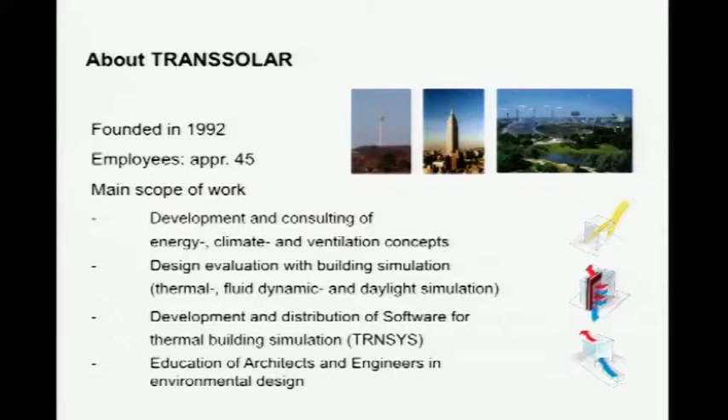Looking at our staff, roughly 50% are classical engineers with a thermodynamic background, power plant technology, thermodynamics. We have roughly 30% physicists, and even teaming up these 2 different disciplines, we made very good experiences. The approach to solve issues is quite different between the 2 of them, and by teaming up, we see better results. Then we have a couple of architects and a couple of HVAC engineers.

So master planning, as I said, we are predicting a future. We are considering or developing solutions out of what we know now for future situations. So it's really a risky thing, but it provides a lot of potential.

Why are we focusing on cities? Transsolar started on a building scale. We try to do energy efficient, comfortable, high comfort, low impact buildings. And more, we were complaining about bad master planning because it's really tough to establish a good building within a bad regulation. So at least one of our clients was pissed off and said, hey guys, you're complaining all the time, so tell me how to do it better.

That was more or less the starting point when we got into this field of master planning, applying more or less the same tools, similar approaches, and trying to develop it. And in the last 2-3 years, we're focusing more and more on cities, on urban developments, because that's one of the main issues, I think, for the near future.

Why? Recently, we got over the threshold that more people are living in urban environments than in rural. More than 30% of the population of the Earth are living in informal settlements. And I think that's a very intriguing topic.

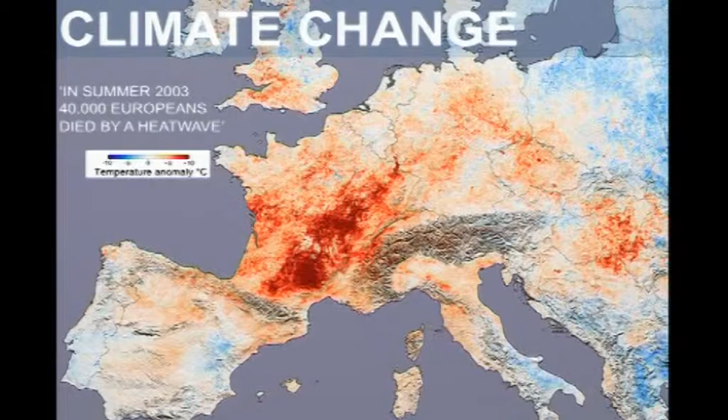So within these boundary conditions, we have another unknown: climate change. There are a lot of models, and for sure disastrous information is always a better sell than, let's say, more comfortable ones. But most of the models predict that the situation we had in 2003, where a heat wave more or less ran over Europe with the consequence of roughly 40,000 people dying as a direct result, will be the common summer of 2050.

How do we deal with that situation in our designs? We have a political situation, and the EU established a kind of roadmap to reduce CO2 emissions. So by 2020, and that's not that far away, by 20 to 30%, and by 2050, by 80 to 95% compared to 1990.

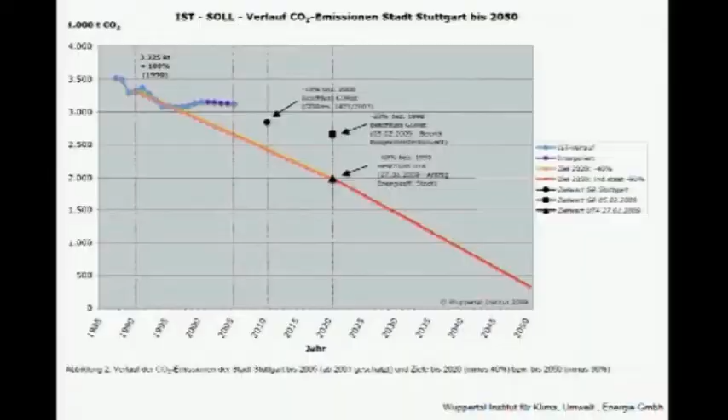So I picked up some figures from my hometown, Stuttgart, in Germany. This red curve identifies the roadmap of the EU, and the blue curve is more or less the recent situation in Stuttgart. So they're far, far away. And there are these political commitments, but in real life, looking at projects, I don't see how they want to achieve these goals within the given time period. So there's even, from an economic point of view, a very uncertain, shaky situation.

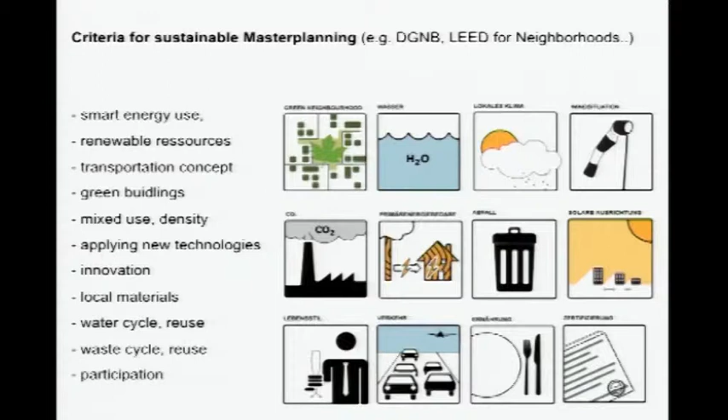So for buildings, it started roughly 20 years ago that we established certification labels for green buildings. I think LEED is one of the most popular systems, and there are systems more or less all around the world. We have Estidama in the Middle East, we have BREEAM, HQE in France. And as an extension, they developed criteria for neighborhoods or for master planning. And even looking at this criteria, it's obvious that master planning is not a one-man show, it's a team approach. And integrating all these experts, I think that's really of essence for a high-quality product.

We established that more or less a couple of years ago, to make it a little bit simpler for us. We have to deal with emissions, and CO2 is a placeholder for that. I think to achieve a vibrant urban situation, the quality of the public realm and accessibility are key essentials. And local identity, I think, is really maybe a new parameter, but driving quite a bit.

Recently, we won a competition for a high-rise building in Addis Ababa in Ethiopia. We had a first kickoff meeting with the client, and he said, at the very end, he was very pleased and everything was fine. And then he said, but I have still two questions. One question: where's the exterior shading? I highly appreciated it because the architect didn't find a way to integrate exterior shading, what we required, more or less through the whole process, in a kind of aesthetical way, so he skipped it for the competition.

But the next question was, where is our African identity? I don't want to have an American high-rise here, I want to have an African high-rise. And how can we transfer your knowledge, your technical approaches, to the local craftsmanship? So how are the social aspects related to this project? And I think, from a bank CEO, I was really astonished, let's say, to have this kind of criteria for a project. And for sure, nobody wants to sacrifice quality.

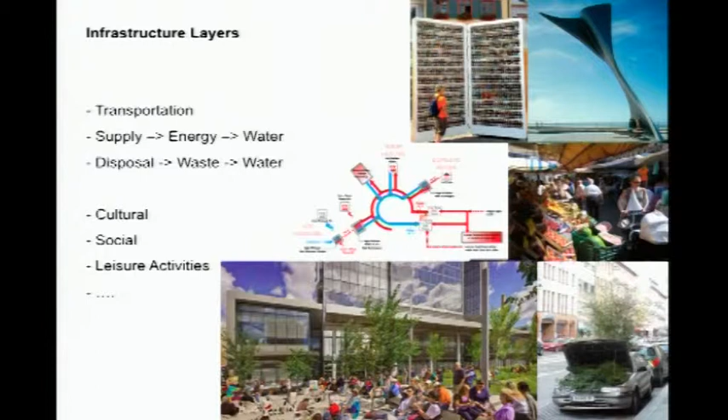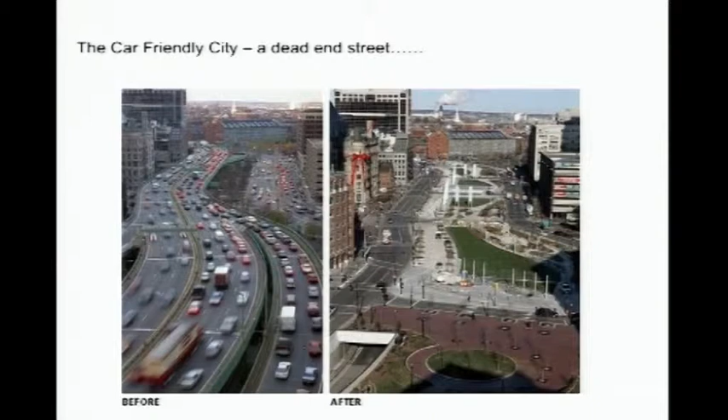And I think looking at master planning in the past, all the approaches developed a scheme focusing on one parameter only. In Germany, we had this hype on the car-friendly city in the 60s and 70s. It ended as a disaster. And now we're slowly trying to go back, improve the urban quality, the quality of the public realm in the downtown areas.

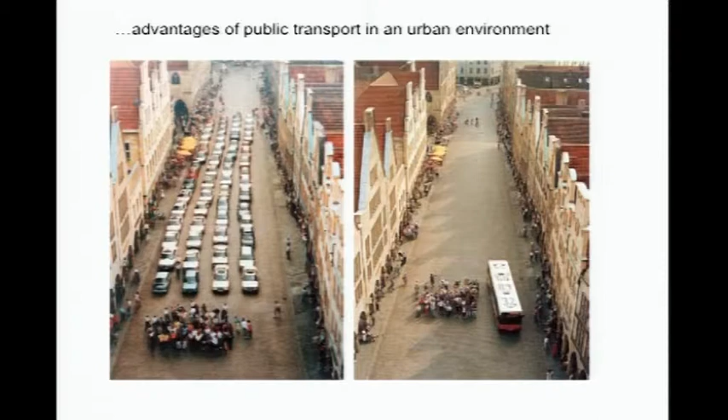So I think the advantages of public transport are obvious, looking only on the space consumption. But especially for a situation like here, we have to think about the connection between the urban situation and the rural situation. Where are the transfer hubs where you can jump on public transport? I think that's something which has to be developed.

Recently I got this figure, and that's a quite popular neighborhood in Stuttgart, really a very dense area. The car ratio is 70% lower than typical for Stuttgart. But 60% of all the car movements are related to leisure activities. And it was something strange, but looking on the city map, parks or places where you can go for a run in the morning are not located very close to this area.

So the people use, for the daily life, public transport to a very high percentage, but for these leisure activities, which was not considered really in the programming of this area, it was a little bit neglected, with the result of car movements.

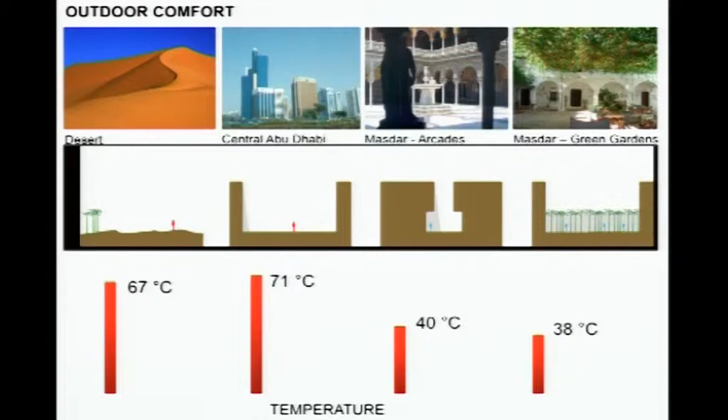So if you go back and have a look how people dealt with that kind of climate in the past, we go significantly down to 40 degrees. It's still not comfortable, but I would say you can survive. At 71 degrees and 80% humidity, it's simply close to dying. And if we improve the situation, we could go even further down.

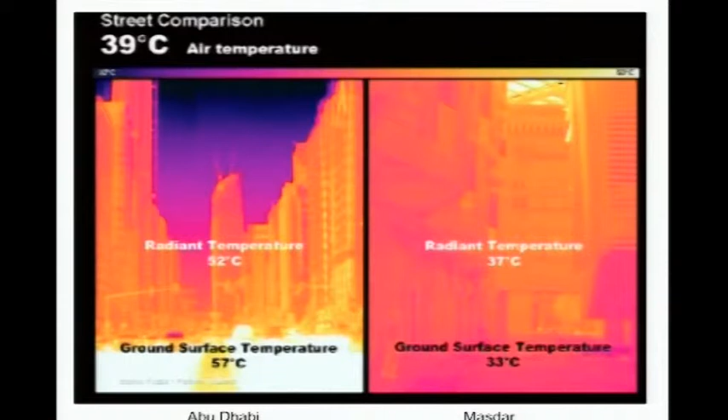We worked a little bit on this Masdar project, and I think there's a lot of discussion for this emission-free city. But we did some simple measurements, and you can measure these effects - it's not something only in theory. So we compared a main street and a place in the Masdar development, and we have really a significant difference. As I said, it's still not comfortable, but you can walk there, you can do whatever you have to do in a pedestrian way.

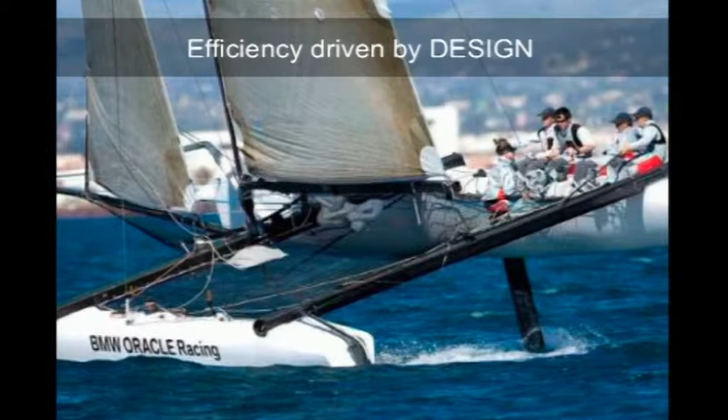So design is really something which has a high impact on the quality, not only of the interior, but also on the outdoor public realm. And that's more or less my credo - the most important slide.

Sustainable development, sustainable planning, whether master planning or related to a building, requires communication. And it seems like a no-brainer, and it seems quite easy. But even with the first meetings, I recognized that the communication, especially between engineers and architects, is difficult. And first of all, I thought it's a typical German problem, but I experienced that situation more or less all around the world.

I was teaching for 2 years in the United States, and I had a great idea to do combined studios with engineers and architects. But approaching the dean of the engineering school, I received a nice email that said, great idea, and I never heard again from this guy. And my architectural dean, she looked at me and said, why? And this level of ignorance on both sides, I think, is really a big obstacle.

I would encourage you to understand this, because it's your daily business life. You have to deal with these guys, and communication requires a certain level of knowledge. I don't think you should be able to do the engineering work, but you have to be aware how these guys are thinking, what their tools are, what the limitations are. You should be able to raise the right questions at the right moment. And in my experience, if you achieve an intense communication in the project, even a tense one, it will be a good one.

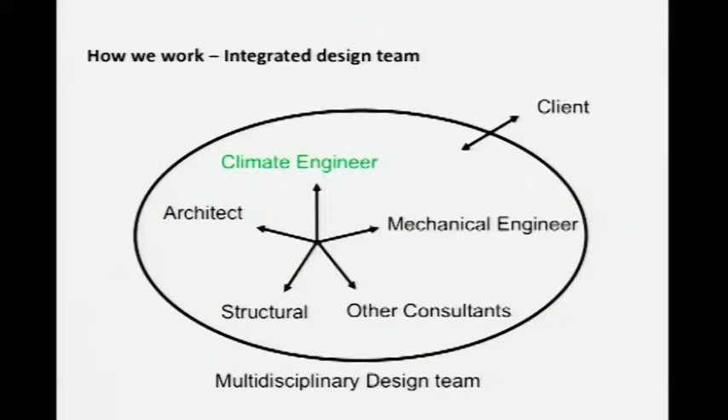So we did this highly sophisticated scheme two weeks after founding the company, and it's only coincidental that this climate engineer is on top. We think the design team is more or less an integrated team. Everybody has to bring their experience to the table, not only as an expert but also as a potential user. In this communication and embedding the expertise of all these guys, then we're on the right way.

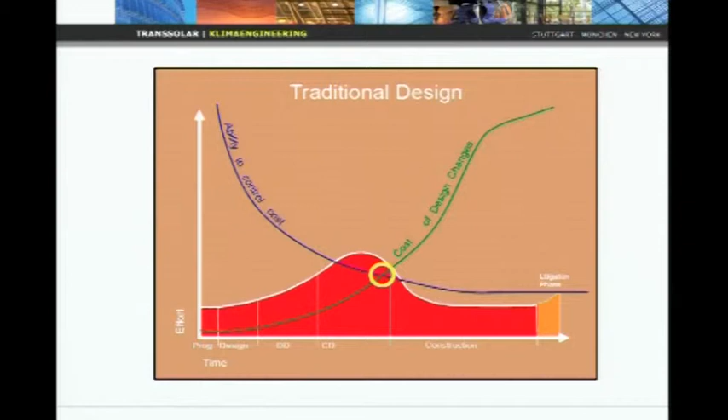And for sure the client has a big impact on the whole thing. So typically when we start a project, the first question is, what is the impact of your work? Because you're not the only player in the game. I got these slides from a business school, and they tried to analyze the design process. On the lower X-axis we have the process of the design phases, and the red curve identifies the effort. They figured out that the main peak of effort is during construction documents, when you do the detailing.

Looking at the impact of changes in terms of costs, it's obvious the later change orders show up, the more expensive they might be. On the other hand, the ability to control cost is reduced as the design progresses. The big decisions have to be made in the early phases, and that determines, let's say, 80% of the costs.

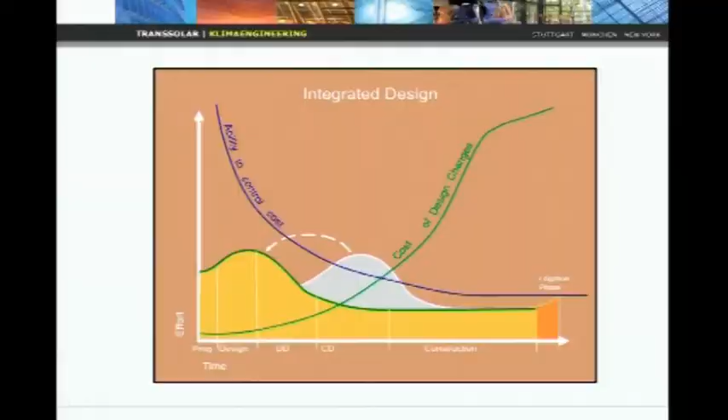So what we propose is more or less to do the same amount of effort, but shift it to the early design phases. Because today we have all the tools for analyzing, modeling, and doing an assessment of the performance of different options that we can provide to the client or whoever the stakeholder is, as a basis for decisions based on figures, not on gut feelings. We can evaluate what the performance will be. So at the very end, it's the same effort, and we achieve better products.

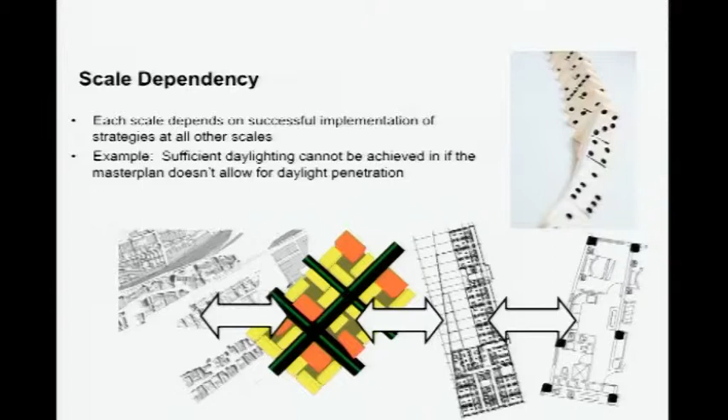So this modeling closes the gap between design and engineering. In addition, as I said at the beginning, we have to rely on each step. If one step leads to a bad result, you cannot really compensate for it in later phases. We need a good master plan, a good block scale, so that we can achieve a high-performing building scale. Each design step has to be done with the same level of scrutiny.

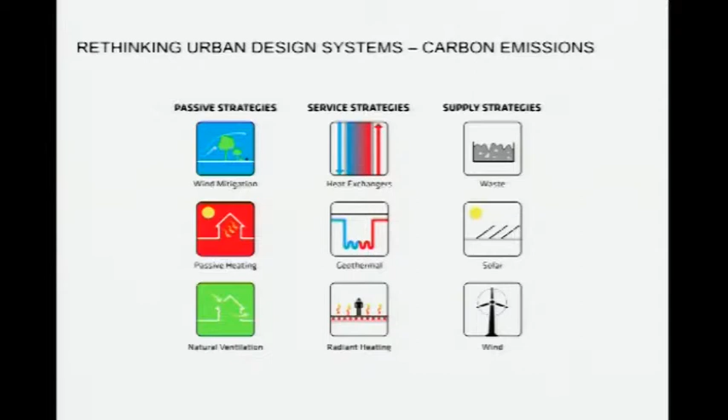For our field, we typically use this three-step approach. I think the lecture before had a four-step approach. First of all, we try to maximize what we call passive performance—solar exposure, the envelope, if you're talking about a building, and so on. In the second step, we look for appropriate building systems and service strategies, and the last step is more or less the supply strategy, so that we can maximize the use of renewable resources.

The problem is that you cannot do these steps in a sequential order because each of them is linked together. There might be a resource available, but this resource, with its limitations, has an impact on the applicable service strategies. So you have to do it vice versa as well.

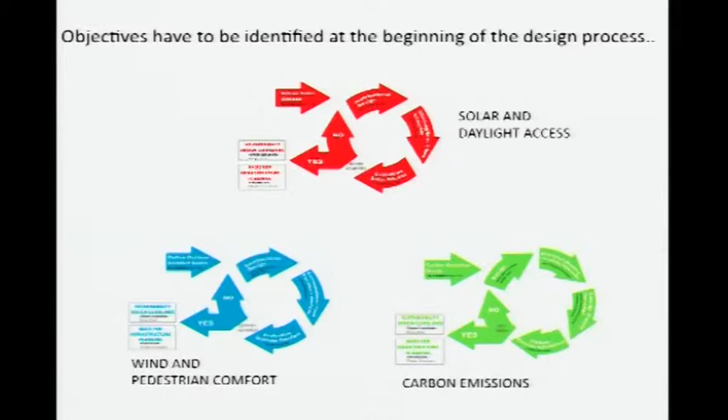So the design process is a kind of iterative game. We have several parameters to optimize, and each of these parameters is linked within a system. Changing one parameter might have an impact on others, so it's not a one-way road. We have to do these iterative cycles, optimizing and looking at the impact on others, so that we achieve, let's say, a well-balanced, well-tailored system at the very end.

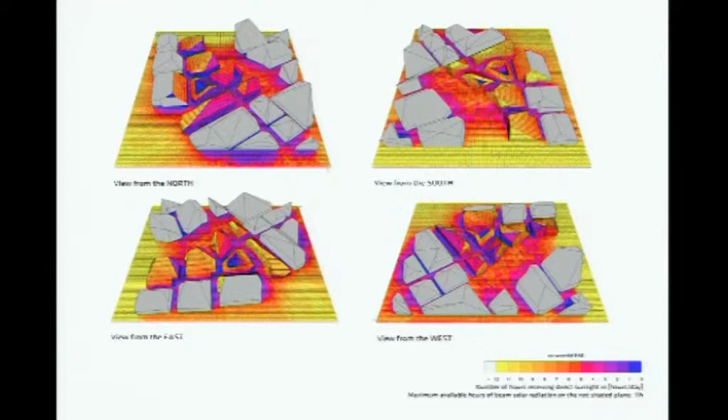So as a little example, we worked on a competition for Helsinki. And as one important parameter, we identified daylight. So we worked a little bit on solar exposure. And the question was how to more or less apply that to a building scale. So we developed 2 different angles.

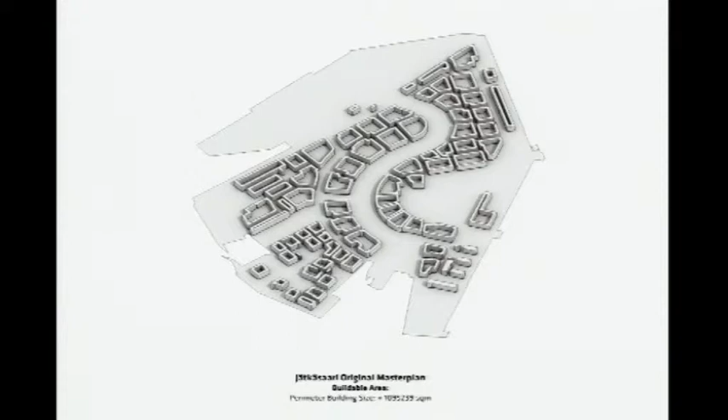South side, it was a kind of focus on harvesting solar energy, passive solar gains. For the north-oriented facade, it was focused on daylight. So we had these 2 different angles. And it was more or less the master plan at the very first beginning. And the architect simply applied these kind of rules very clearly, let's say, to this master plan.

And it was funny how a quite vibrant pattern popped up. I think it was too scaring for the developer. I'm not sure if that was the reason that we lost this competition, but it was for us a very nice example.

So I put a slide in because I suffered roughly 1 year with this little problem. In Germany, we had a hype on district heating systems, I would say 10, 15 years ago. A lot of communities invested in district heating, linked it to combined heat and power generation or waste incineration to reduce CO2 emissions, which makes absolutely sense and is a reasonable thing to do.

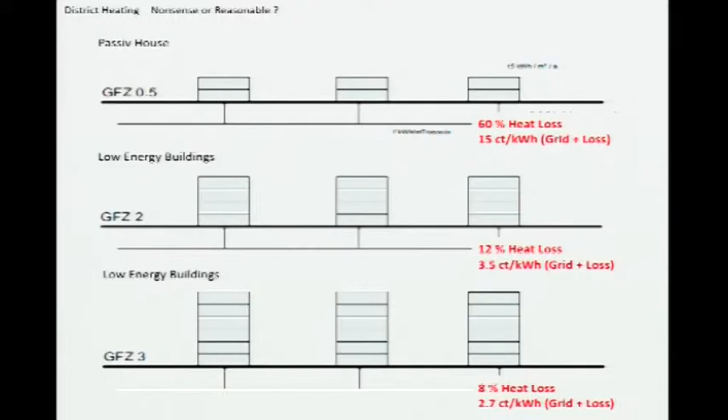Then more recently, the Passivhaus approach became very popular in Germany. Passivhaus means you have a highly insulated, airtight building with a mechanic ventilation and a very minimized heating consumption. So now the problem is that a lot of these communities have these district heating systems and then do the combination with Passivhaus. So for new developments, they require Passivhaus standard. And it seems to be logical that a good system and another good system makes a very good system.

So in addition, to reduce the heating demand of a Passivhaus, you have to use mechanic ventilation, which is not very common in Germany for residential units. Which means that you operate with highly rated electrical energy, a ventilation system, to minimize heating consumption, which is already produced in a very efficient way with very low CO2 emissions. So if you do the balance overall, by combining these two good ideas, you increase the CO2 emissions, which is a contradictory point.

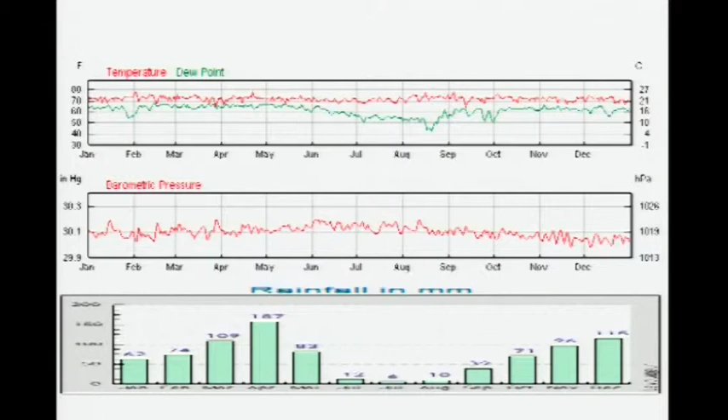So going to a first little project, and it's not really a project. It was a development, a hospital in Rwanda, and the whole scheme was developed, I would say, within 2 hours in the coffee corner, because it's an unbudgeted project for us. And looking on the climatic situation, it's very close to the equator, but it's really perfect. It's not too hot, not too cold. The humidity is appropriate, so you don't need any kind of mechanical systems, more or less, to condition outside air. All over the year, it's very comfortable.

So the site is in a very hilly area, and they had a problem that the technical infrastructure, for example, the supply of electrical energy, was not really reliable. They used an old generator driven by diesel, and it went out of order very frequently. The problem was that the mechanic ventilation system then stopped, the systems for the surgery stopped, and the question was how to make them more independent from these technical approaches. And then this very, very simple scheme was developed that we maximize natural ventilation. We take benefit of the local wind situation there, maximizing daylight supply into the spaces.

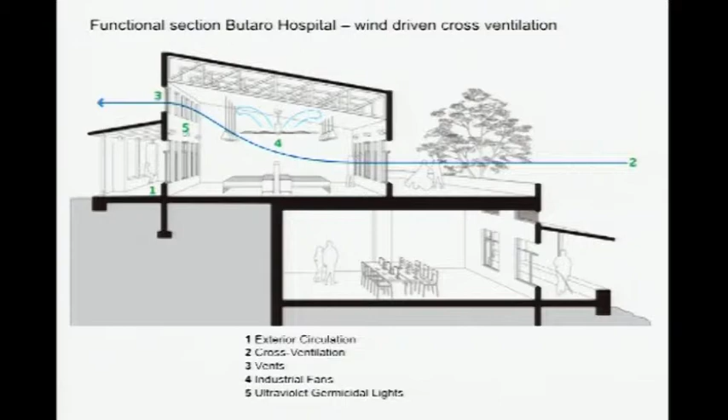And for that, we had a long discussion with a Swiss expert on hygienics. I think the Swiss are the most experienced guys for hygienic issues. And he said, from his perspective, he's voting for naturally ventilated surgery rooms because the infection rate is directly linked to the airflow you can create, and there is no mechanic system able to create airflows which we can create by natural ventilation in this kind of situation. So even from a performance point of view, we have better results now than before.

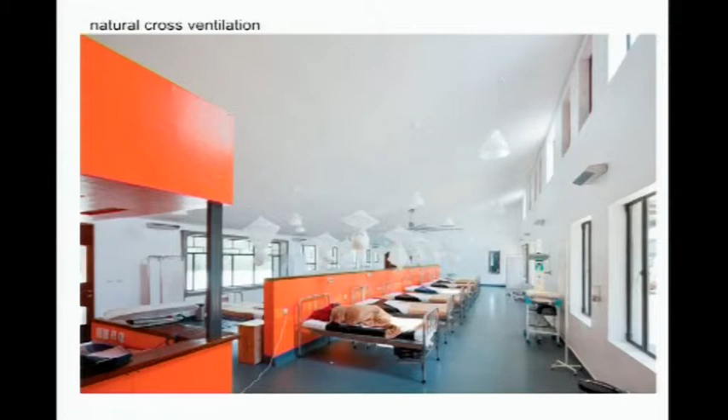And you see it's a kind of daylight flooded space, very simple, very easy, but it was done completely with local materials. The technical installation is very limited, so the people are able to operate it in an appropriate way.

The client appreciated this approach, and so the next project was coming up. It's a kind of retrofit and extension of an existing hospital, and it's a slightly different site. It's in a valley, so we don't have these prevailing winds supporting natural ventilation. So the idea was to use solar energy to drive the ventilation.

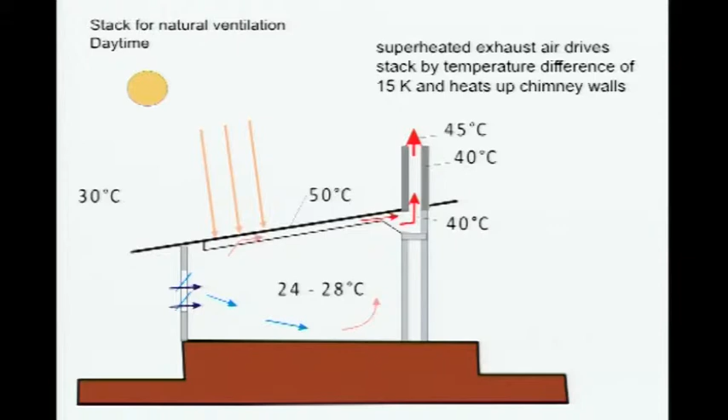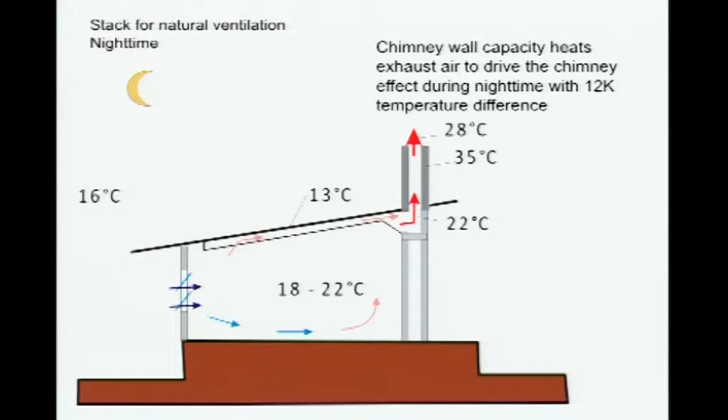So in this scheme, we have a kind of collecting solar heat, very simple, with a roof. We overheat the exhaust air, and then we have a kind of solar stack on top. And this stack heats up during the day so that we still have some energy left during nighttime hours to drive this ventilation. The advantage we have is there's no mechanical installation at all for this ventilation purpose.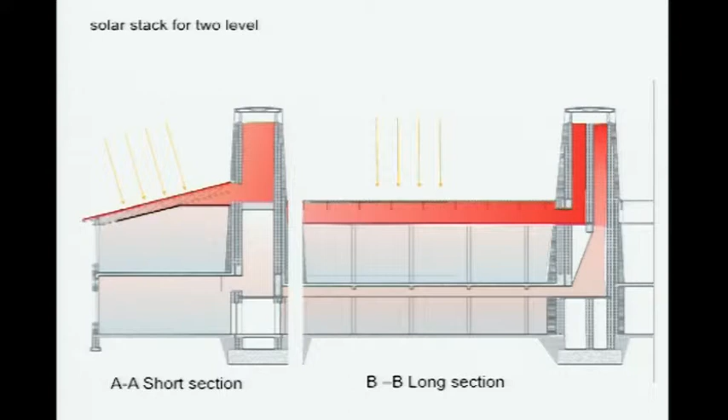It's under construction, and I'm really keen to see how it will work. It's a 2-level building, so we developed a scheme more or less that we have a possibility to apply the lower level to the same solar stack, that we have more or less similar situations.

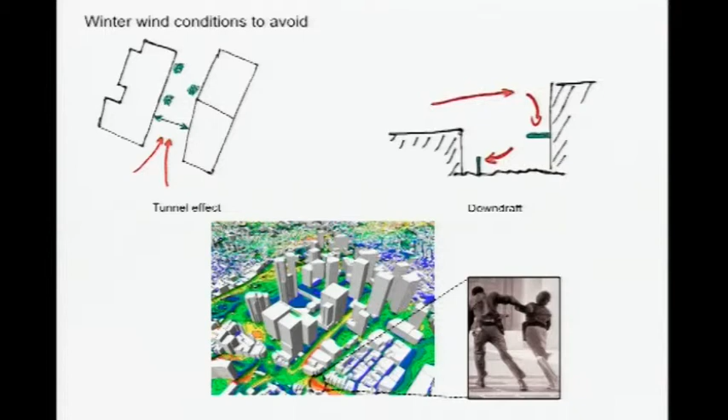I think it's obvious that there is an impact of the built environment on the wind situation, and it's not really highly sophisticated, but not considering this situation, you can create really awful places. So we're talking about, let's say, narrowing wind or redirecting of wind through the building height. And typically that's a starting point for master planning issues.

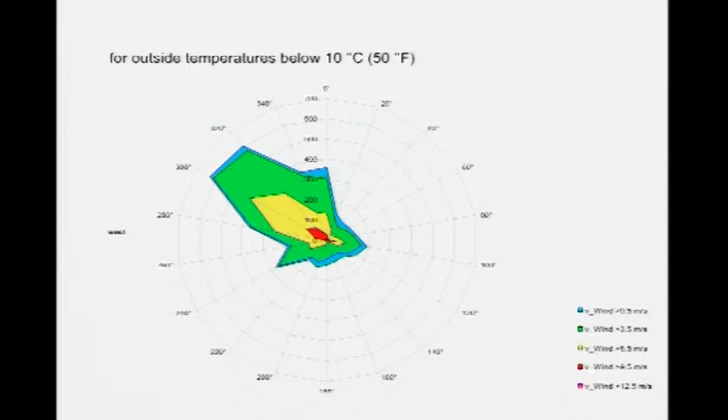So that's an example for Boston. So we have winter winds out of this direction, northwest. And the summer winds, the warmer winds, are coming more or less from southwest.

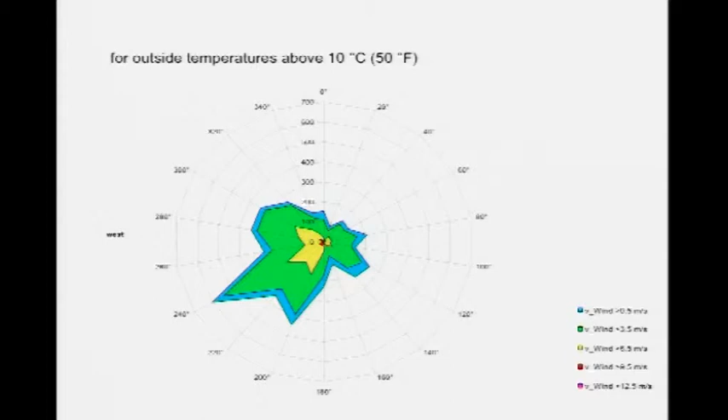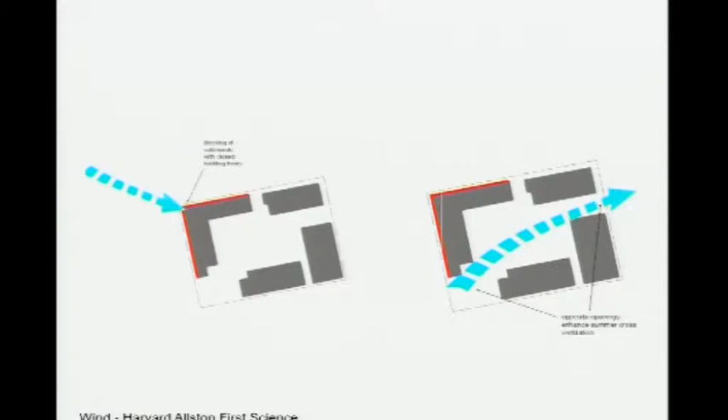Oops. So the architectural idea for this development was the Harvard Yard. So very British approach with courtyards and buildings surrounding. And so we very simply rotated it a little bit, that we block out the cold winter winds and have the openings more or less for the summer breeze. For sure, you cannot consider only, let's say, a local situation. You have to consider, let's say, the whole setup.

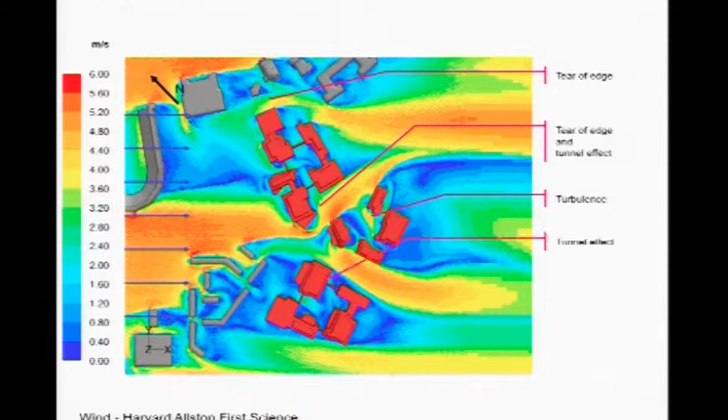So we have the gray buildings, which are the existing ones, and red ones as the planned new developments. So we have the situation of an edge situation where air accelerates. We have the edge combined with a tunnel. And here we have a low pressure zone which redirects the wind, creating high wind velocities in front of the other building, and so on. So you have to consider, let's say, these simple situations and their way to mitigate it.

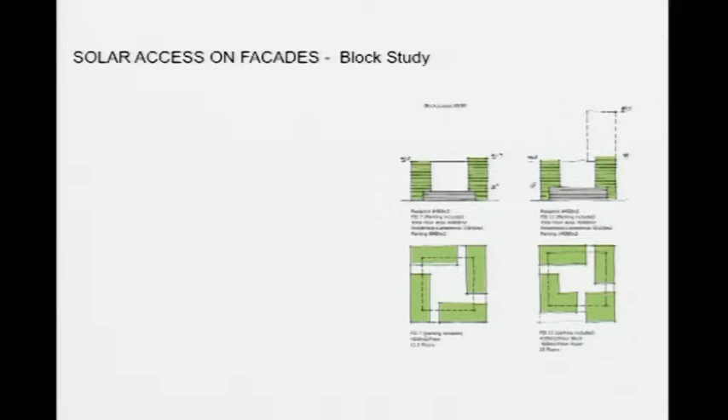And here I want to show you a project where we applied these kind of rules. So I picked out two aspects. So for sure we worked on energy supply and so on. But I think one interesting part was the solar study we did at the very first beginning. And the question was, what is the ideal grid for this setup? It's a development in Toronto in Canada. And I think it's a very common situation. It's a former industrial harbor area now transferred into a kind of residential area.

So one starting point was that solar exposure. There are a couple of rules all around the world, slightly different, but dealing with direct solar radiation on residential areas. And we picked them up and tried to focus on that. So we worked with different sizes of the streets and different orientations of the grid.

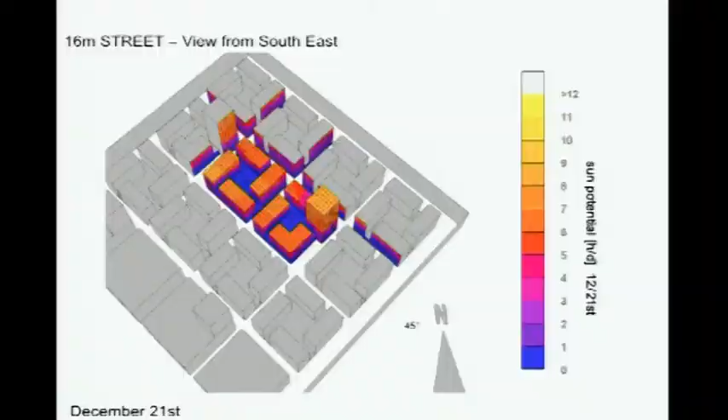So we started with north. Then we rotated it by 20 degrees. And the last option was a rotation of 45 degrees. And the question was, what is the impact on the solar exposure? And we did that little exercise for different street sizes.

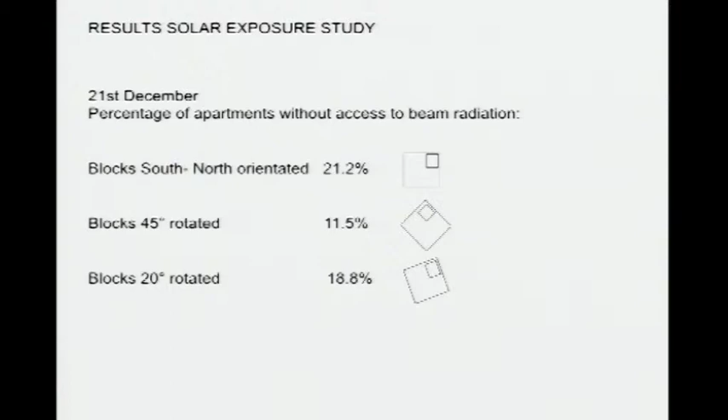And looking on the results, I think for us it was quite amazing that the 45-degree grid more or less reduced the number of apartments with a blocked situation by 50% compared to the north-south oriented grid. So that was one of the main reasons to go for a 45-degree oriented grid.

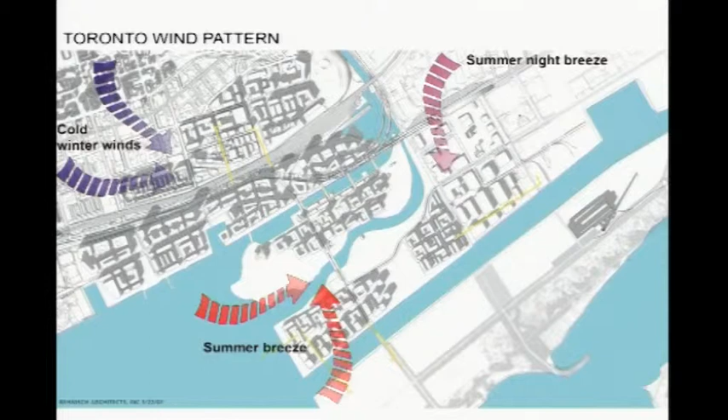So then we identified, let's say, important areas to protect, pedestrian areas, areas for leisure activities in the public realm. And I think you have to be aware it's not a black and white decision. We will not cover 100% of the year providing highly comfortable situations there. But we increase the time of good conditions, let's say, by 20, 30, 40%. And that's the goal of this exercise.

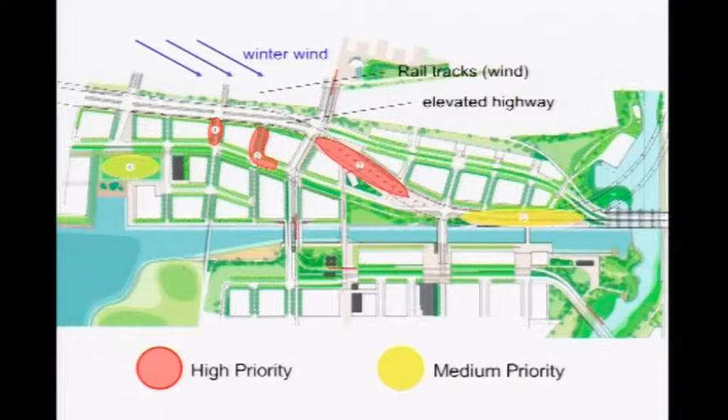So we identified critical areas. So we have wind acceleration. And then, for example, here with a little recess compared to here, we reduce the air velocity significantly on the pedestrian level. So very simple geometric approaches to handle, let's say, these situations.

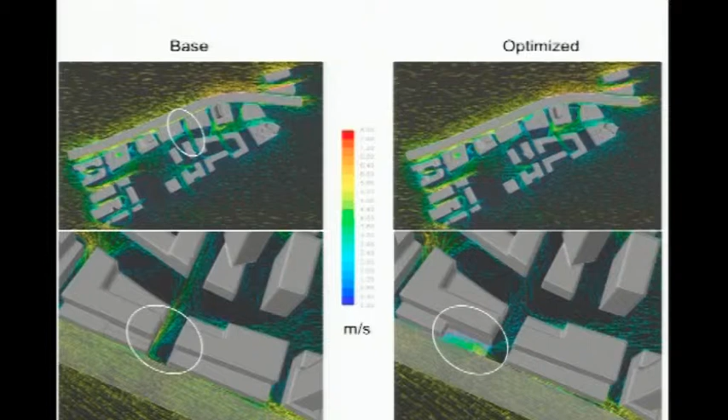And here we have a similar situation. We have a downdraft created by this little tower here, with the result of high air velocities on the pedestrian level. And by raising this recess up, we could handle that.

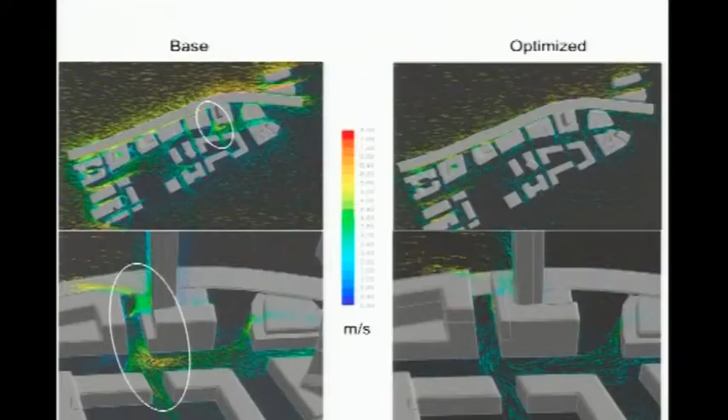So we did this exercise for a couple of block elements, but the question was how to implement it, how to make sure that for the next 10, 15 years of development, these kinds of guidelines will be respected. And the idea to define the geometry of the volumes sounds like a ridiculous idea for us, because we cannot predict what kind of program will be there. Is the geometric approach we have reasonable if the program changes dramatically, which could happen each day?

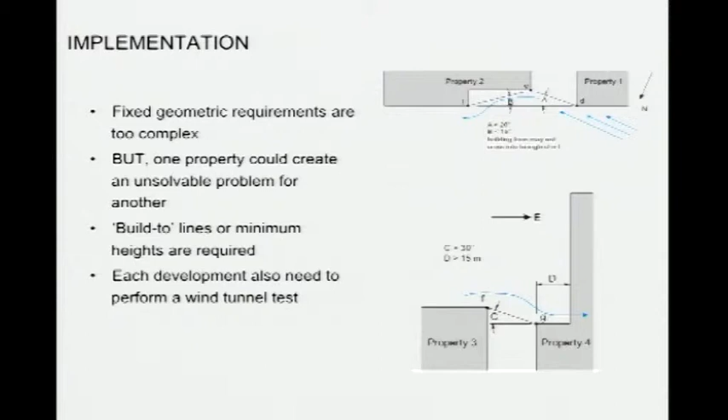So the problem was to be sure that there's no negative impact on the future developments. So the idea was to define very simple guidelines in terms of distance and height, and to make it mandatory that each new development has to pass a kind of wind tunnel testing. So if you sign a contract buying a piece of land there, you also sign this kind of commitment that you will go through this wind tunnel testing in a predefined, organized way. So we're quite sure that these rules will be applied.

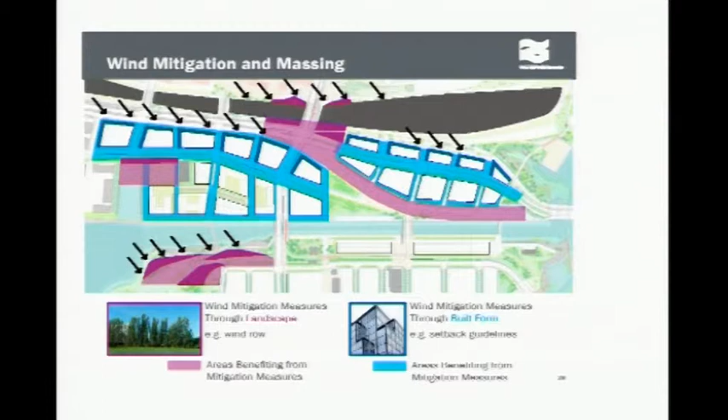So we can jump over that. At the very end, to mitigate wind, we have two main tools. We can use landscape, hedges, trees, this kind of stuff. And we can, for sure, use the built environment. And the combination of these two leads to the results we're shooting for. But it's obvious that it requires all kinds of experts around the table to find an appropriate way to implement these kinds of approaches.

The next project I want to show you is focused on a building itself. It's a high-rise in Winnipeg, Canada. And I wasn't aware that people are living in such climatic conditions, I have to confess. The first time we arrived there, it was in the range of minus 38. But in summer, they go up to 35, 38 degrees with high humidity. So you have a long, awfully cold winter period and a 6 to 8 week summer period with high temperatures and high humidity. So it's really a very continental, dramatic climate.

We had a first contact with the client. He was sending a team of people all around the world to identify best practice in green buildings, because the board decided to put a certain percentage on top of the building construction budget, but they wanted to have the most sustainable building in the world, or at least in North America. And I think it was the first project where we signed a charter at the beginning, defining the goals and objectives of this project. And it wasn't only all consultants signing this charter, it was also the client itself.

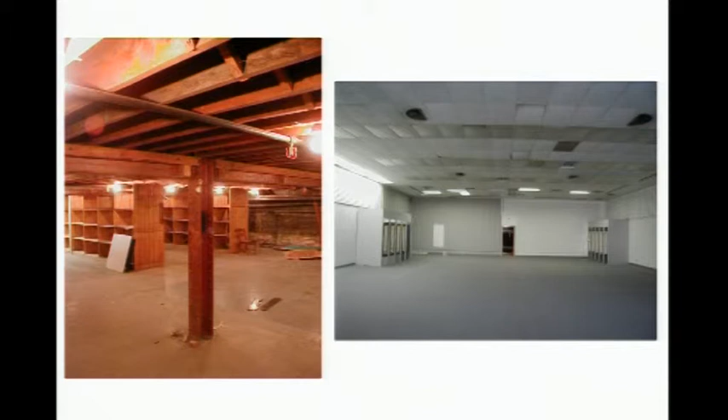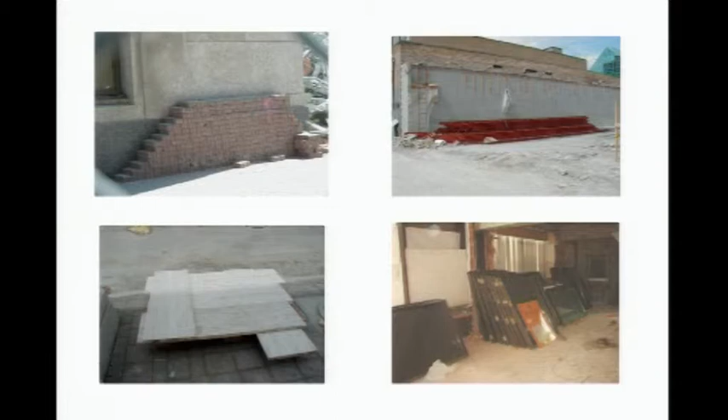That's the site before we got started. And even in the deconstruction phase, the client was very keen to separate materials. I think it's not that outstanding in our area here, but for North America, it really was a quite aggressive approach.

One of the existing buildings is a bank building, and all the partition walls were in really good shape. And coincidentally, we ran into these guys, a non-profit organization doing construction for hikers in the wilderness. And so we had a direct reuse. Most of the partition walls went to these guys. They were on the way to retrofit their building, so they could use all this interior stuff.

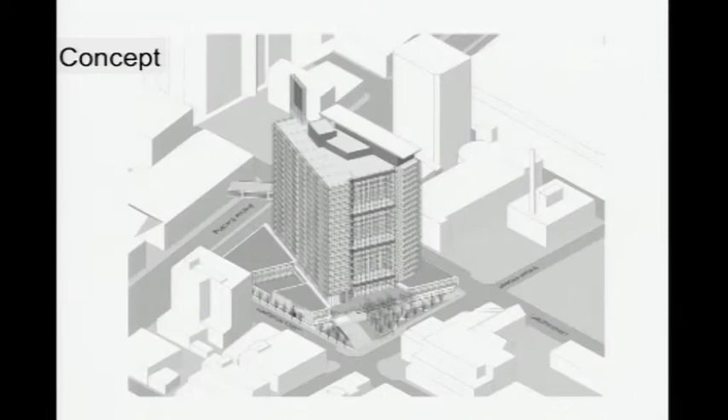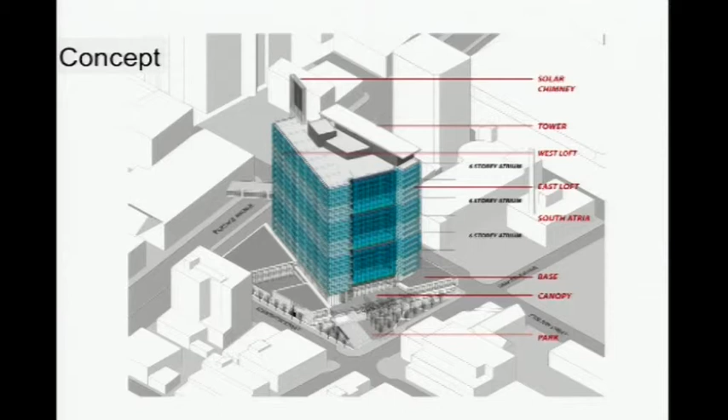Looking at the concept, we really did a thorough analysis of the local climate conditions. And one thing we figured out was that in terms of solar insolation, they have double the amount of solar insolation in winter compared to mid-Europe. So it's a combination of a very cold but sunny and bright climate in winter. So the main idea was to do a south-oriented building with huge greenhouses oriented to the south for harvesting solar gains. And we do a kind of preconditioning of outside air in these greenhouses.

The energy supply system is based on a geothermal field underneath the building, so we have 280 boreholes. And on the exhaust side, we have a solar stack, so there is no mechanical fan to exhaust the air.

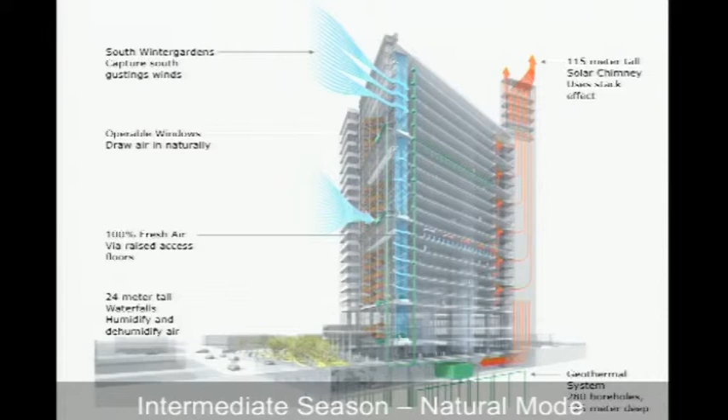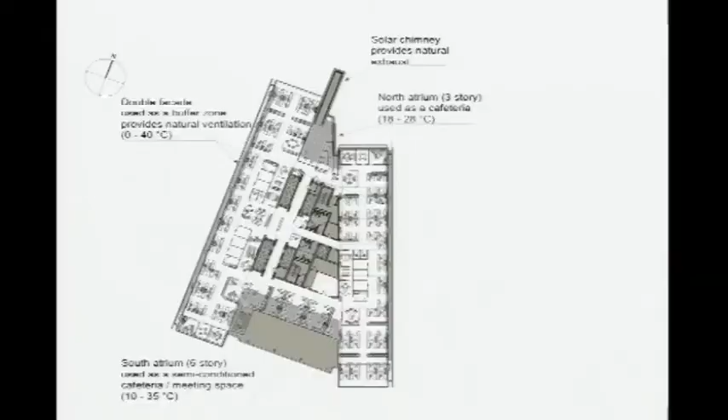If you look on the floor plan, we have the south-oriented atrium space, and we wrapped a double-skin facade all around the building, where we control the temperature of this cavity and keep it always above freezing. For sure, we're sacrificing a certain amount of energy by that, but the client told us that in all of their buildings they experience serious problems with molding and freezing in winter because they have to humidify outside air at very low outside air temperatures. So at each leakage in the facade you get condensation and then the problems. This approach is meant to avoid that.

We addressed new technologies for this area, so we use the whole ceiling as a mechanical device for conditioning the space. We have pipes embedded in the ceiling, and we run hot or cold water through it, so we temper more or less the whole building with it.

The ventilation system only has to cover the hygienic demand, to ensure good air quality. What you see here on the left side is a mechanical space, because we bring outside air into these spaces. In winter, we preheat it by solar gains, and then we have little air handlers on each floor supplying air into the floor spaces. On the exhaust side, we have the heat recovery connected to the air intakes here.

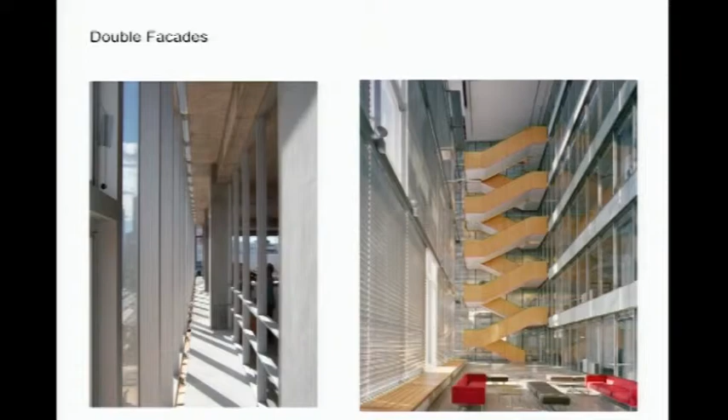In addition, we have a water wall installation. It's a kind of fountain where water runs down on cables, and we use it in winter for humidifying outside air and in summer for dehumidifying. It sounds a little odd to use water for dehumidification, but it's basic physics: if the water is cold enough, the water in the air condensates on that cold surface, and we get the required effect.

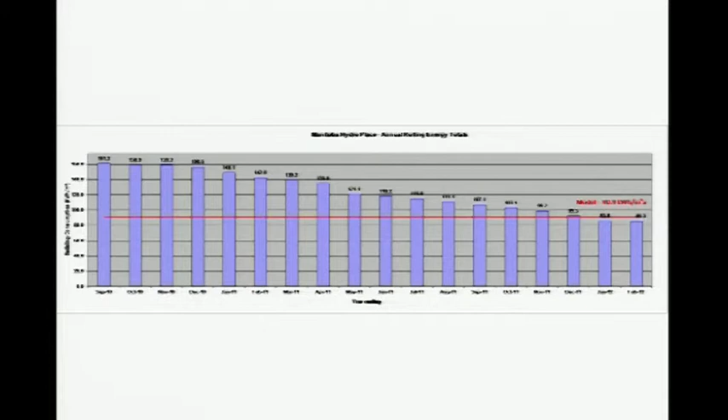If we put it into comparison with other Canadian buildings, we see that we're performing quite well.

But what brings this whole thing into a more urban context is that the awareness of the people is really astonishing. Roughly 70% of the employees moved from individual traffic to public transport, because they were spread in small units all over town, especially in the suburbs, and now people are reluctant to go with their own cars into the downtown area. The guys there told me it has a really beneficial effect even on the social life of the employees, because before, after work, they went to their car and went home. Now they share a ride on the bus or a drink in a bar or whatever, so the communication between people has increased significantly.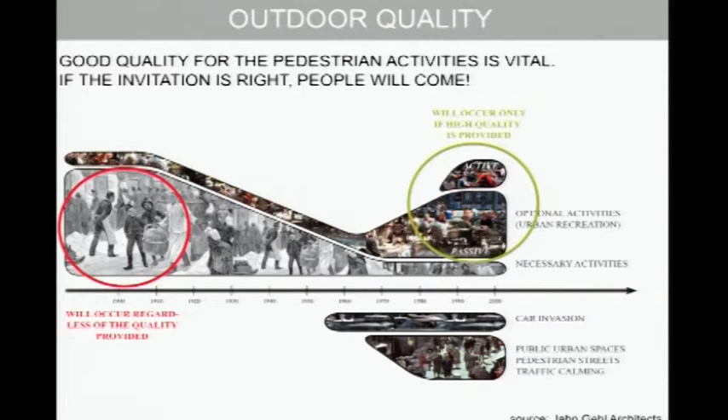Looking a bit at outdoor comfort, I borrowed this slide from Jan Gehl of Copenhagen. I never had thought about this, but his point is that in the past you had to use the public realm for business and many activities. Today we've reached a point where it's not necessary anymore—the cyber kid could sit in his flat, order his pizza via internet, do his banking online, do his business online. So to provide a vibrant urban life, you have to provide quality in the urban spaces. We're lucky that car invasion, as he calls it, is being reduced more and more—people are no longer accepting being tortured by cars. So the focus on public places gets more and more important.

On outdoor comfort, here's an example from a completely different climatic area. We had a request from the mayor of Muscat—they want to improve local conditions in a lot of places, translating slowly toward high-quality tourism operations, and for that they want to improve outdoor conditions at certain spots. So the question was, what can we do in our climate to make people feel more comfortable? This relates to perceived temperature.

Perceived temperature considers air temperature, air humidity, wind speed, and mean radiant temperature, which means the temperature radiated by the built environment. So that gets very close to what you feel.

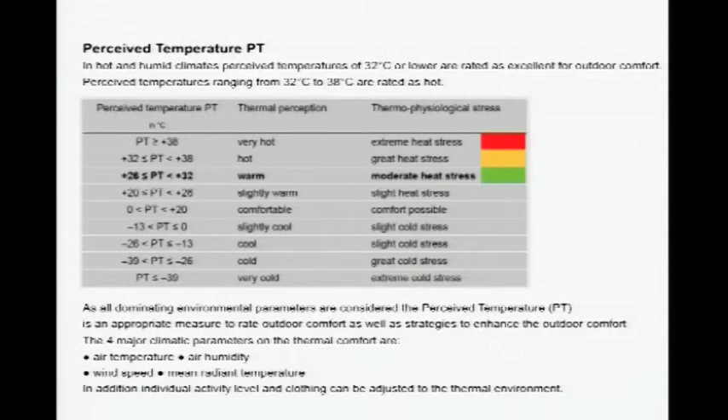And we use this tool, supplied different measures, did some simulations. At the very end, we developed a kind of catalog identifying measures with specific parameters, so they can use it in a very easy way, what they want to apply, what is the level of comfort.

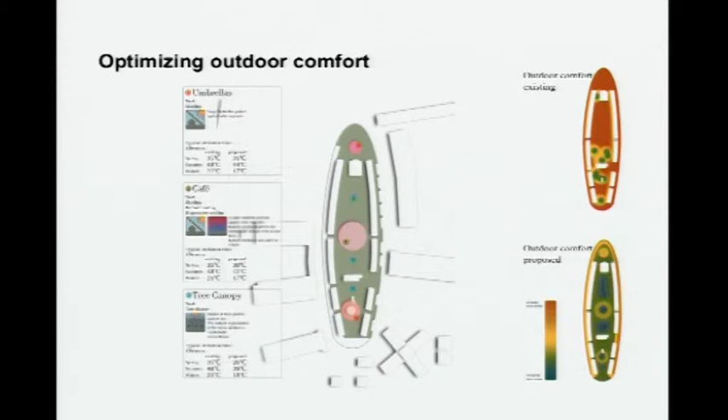They want to achieve at a certain place. And it's a kind of escalating hierarchy. We did this calculation for one example. It's an open fruit market. And the question was, what can we achieve with very low, very simple approaches? What is the reasonable thing to do?

So now we're jumping back to my hometown. I think we had a very simple African project, a more technical North American project, so I have to speed up a little bit. Now we have a simple German project.

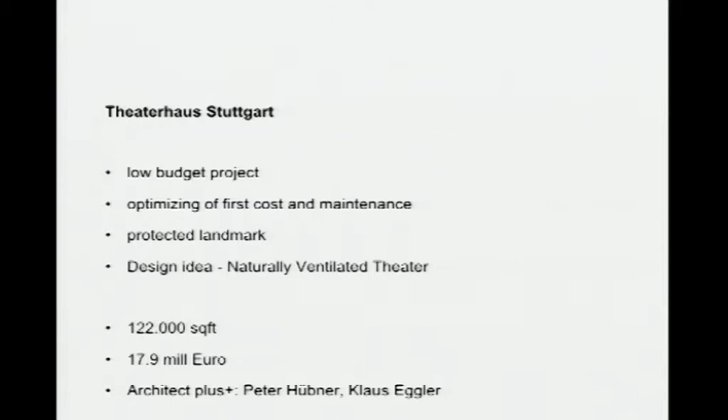These guys, a private association, had the idea to provide a cultural space for alternative culture. So they founded a little company and had a warehouse in the suburbs of Stuttgart. It was very successful, but the climatical conditions were harsh, awful. So they approached the city, and the city donated a site for them. We worked roughly 15 years, from the very first beginning raising funding, raising money, till the very end.

The scheme is very simple. We go in, we have a ground-coupled earth duct for preconditioning outside air, preheating in winter, pre-cooling in summer. Then we enter the theater space, and then we go up through an air stack.

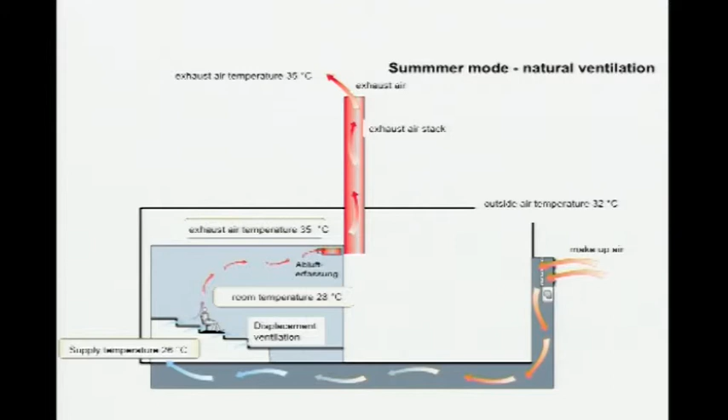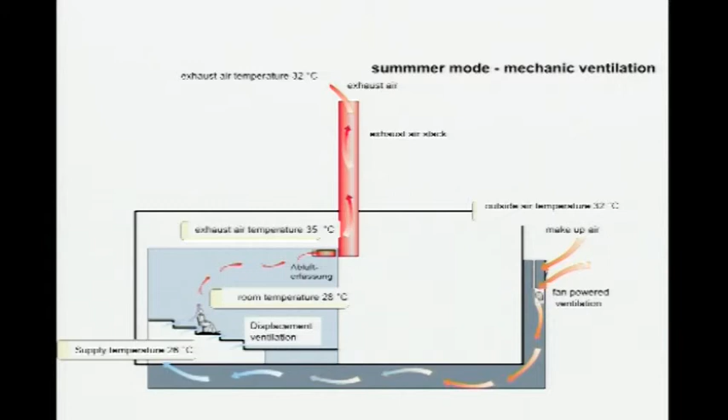If we don't have enough airflow, because by code we are requested to provide a certain amount of air to the space, then this flap closes and a fan ensures enough airflow through the space. The whole system is designed for natural airflow, which means low pressure drops, big sections, so the fan benefits because we need roughly 10% of a typical fan power to move this amount of air.

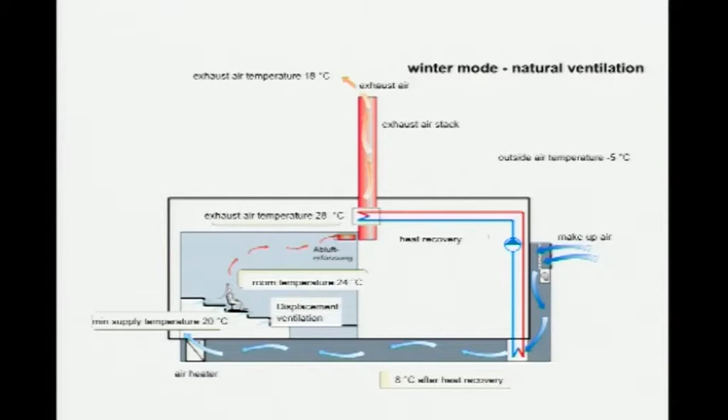In winter, we have a heat recovery system which recovers roughly 50% and leaves enough heat in the exhaust air to drive the air exchange.

So we did a lot of calculations, a lot of proceedings in this kind of development. But due to the lack of budget, we reduced the system step by step. At the very end it was a very simple thing, very cheap, because we had to do this excavation to reinforce the existing foundation. So we had this void, and we filled it up with our air ducts.

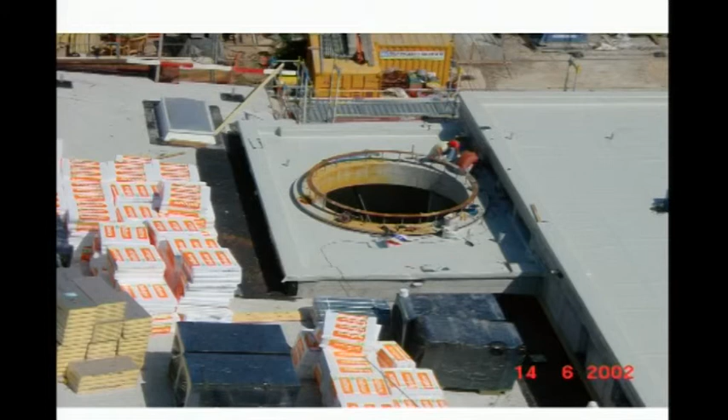That's the base of the exhaust stack. It's a landmark protected building, and we had a long discussion with the landmark committee to improve that.

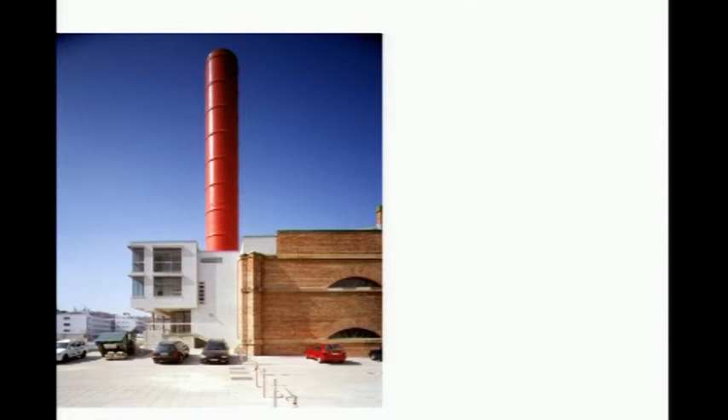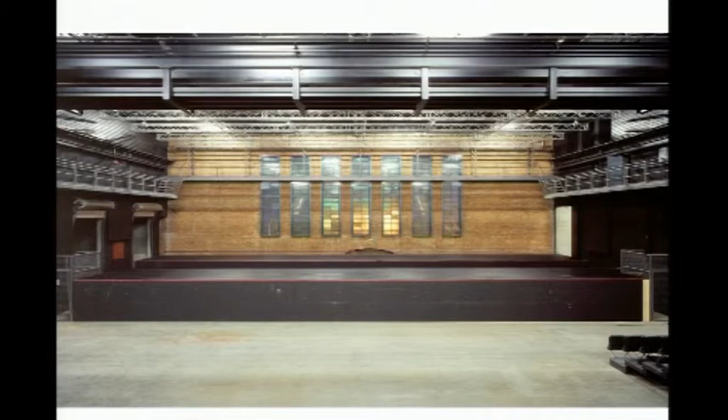And that's the final issue. So here's the total hall, the big stage. That was more or less the hall at the beginning.

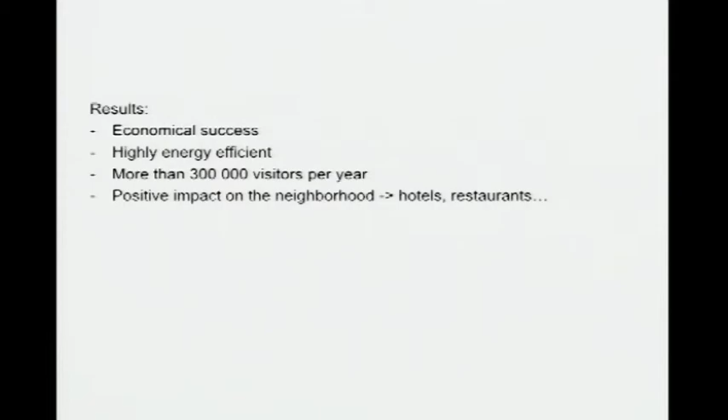So the impact on the neighborhood is really extraordinary. They have roughly 300,000 visitors a year, which is more than 3 times higher than what they predicted at the beginning, with all the benefit on the hotels, the restaurants, the area.

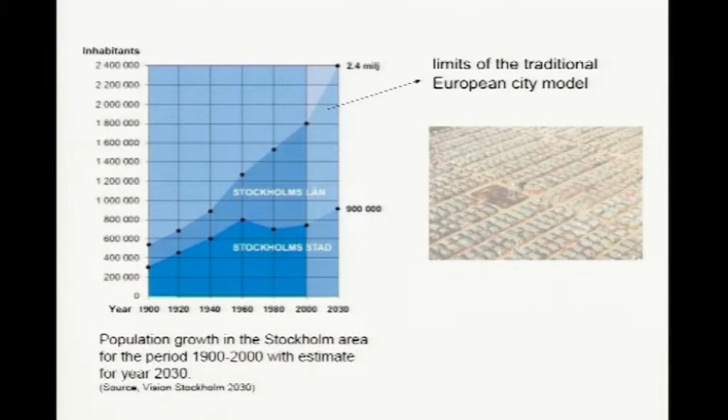So I skipped that. I think you know your town better than I do.

So just wrapping up, I think it's risky to give a lot of things away. I think the architect has to be the center part of it. And in Germany, he has a very strong position because legally he's more or less in charge of everything. So if the client wants to sue somebody, he always sues the architect.

So it's more or less in the own interest of the architect to get everything working very well. I think engineers should contribute, but an aesthetical core is required. And this strong position of the architect is, I think, one prerequisite to achieve high quality for a fair price.

So at the very end, I would like to focus on the methodology. I think this communication within the design team and this open-mindedness from all the involved people is really a prerequisite to achieve good projects. And we are in a prototype business.

We cannot reproduce one design for another site. The site is different, the climate is different, and cultural difference might have an impact on the design. So we have to be aware that even if you pick up the same components, it might be a different setup. And even if the site is scaring, there's always a positive aspect. Maybe from time to time it needs something to dig it out, but it is for sure somewhere.